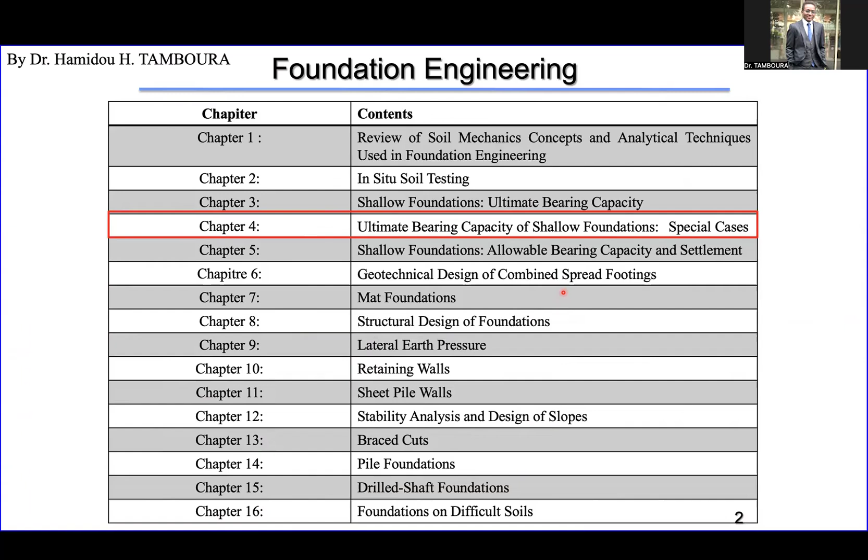We are on chapter number 4, special cases of ultimate bearing capacity of shallow foundation. And today we will talk about point number 7 of this chapter. It is about closely spaced foundation. So the effect on ultimate bearing capacity: if you bring two footings very close, what will be the effect on the bearing capacity?

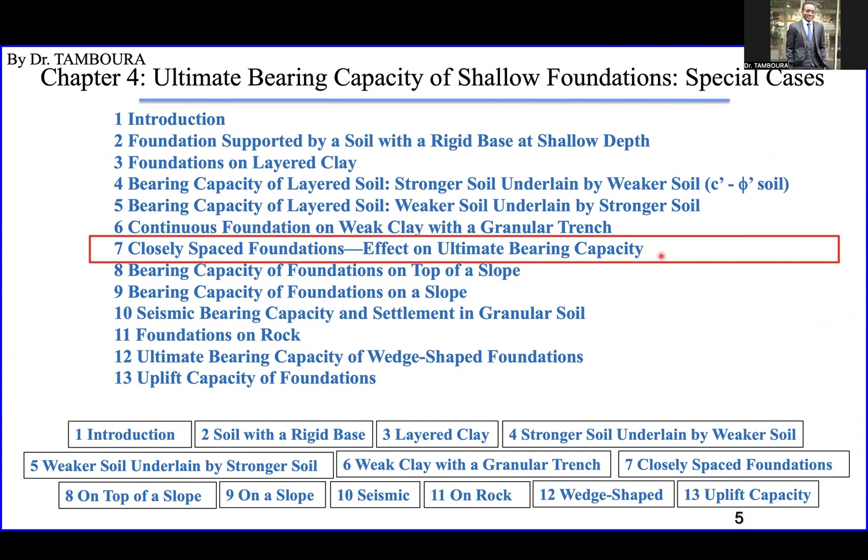So each footing will affect the other one. How can we estimate the bearing capacity of each of them? That obviously will depend on the space between the two footings. Okay, so let's go then. Closely spaced foundation, effect on ultimate bearing capacity.

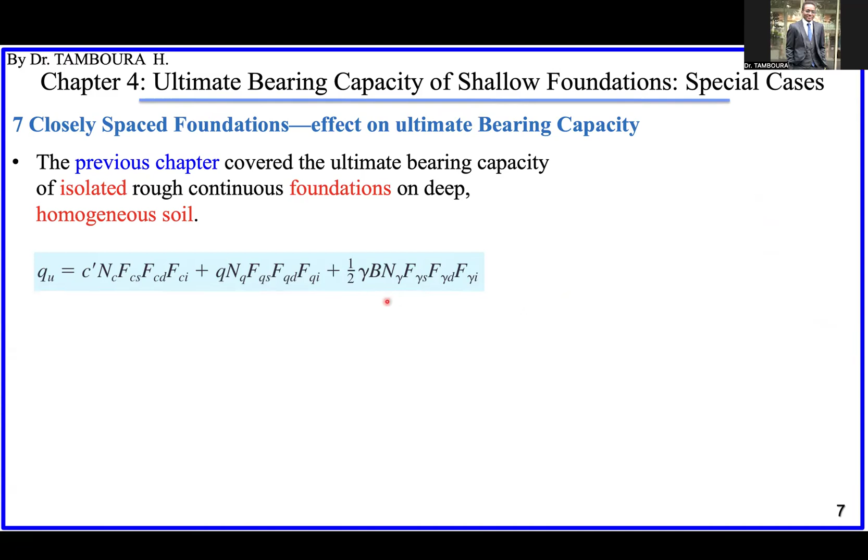As you know, in the previous chapter, what we did was only for an isolated footing on uniform soil. And we showed that in that case, this formula is effective to estimate the ultimate bearing capacity. But when foundations are placed close together on similar soil, the bearing capacity can be affected by the interference between overlapping failure surfaces.

As you know by now, everything depends on the failure surface of the foundation. In case of two soil layers, when the failure surface crosses the border, there is an effect. When it doesn't cross, there is no influence. Similarly here, if you have two footings near each other and the slip failure surfaces meet somewhere, there will be influence.

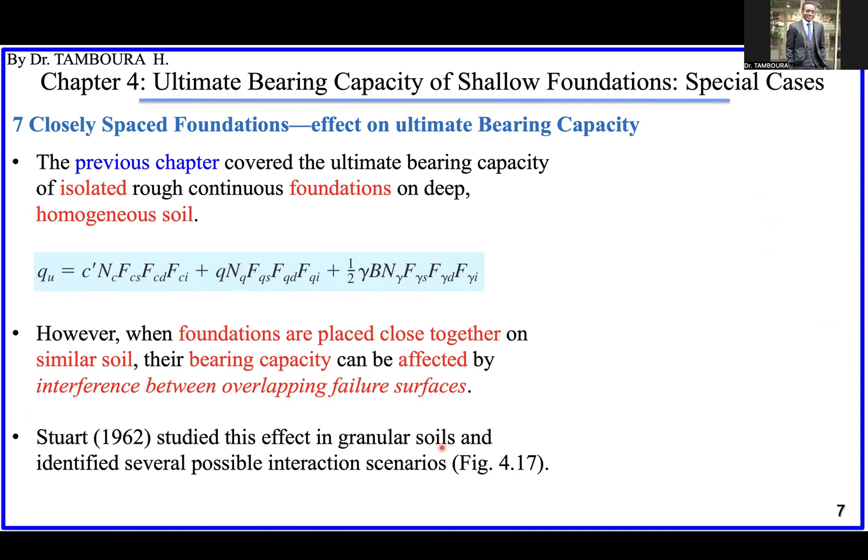Stuart (1962) studied this kind of situation on granular soil. Granular soil means there is no cohesion, like sand or gravel. And he identified some possible interaction scenarios, illustrated here. We have 4 possible cases, and step by step we are going to see how to estimate the ultimate bearing capacity in each case.

As you can see here, these failure surfaces are almost independent. There is no interference here. But here the interference is there, so obviously these footings will affect each other. And here is another situation; it's very close, almost touching.

Today we are going to see in each of these cases how the ultimate bearing capacity can be obtained. But remember, this is only for granular soil, and these are similar footings: B here and B here, same size. In case of cohesive soil, you can take it as a research topic and investigate what will happen.

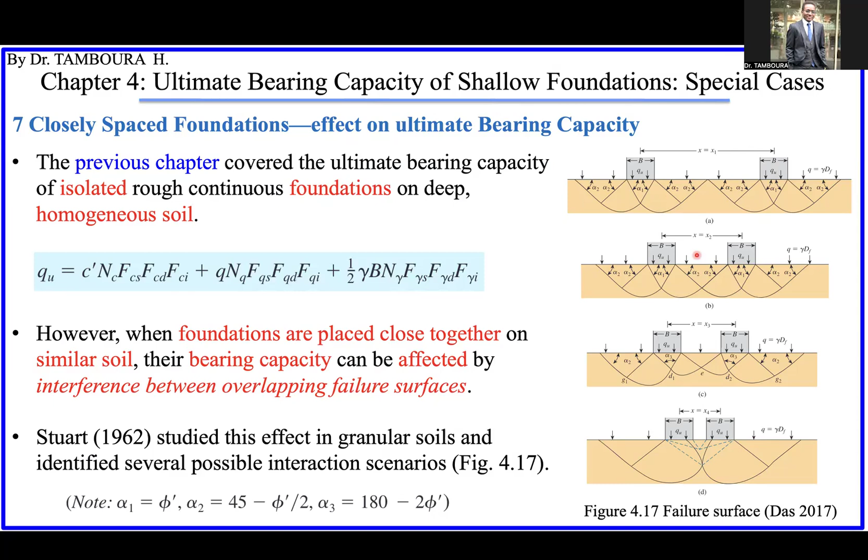All right. The angles: alpha 1 here and here is equal to phi prime, the friction angle of the soil. Alpha 2 is equal to 45 minus half of phi prime, similar to the Terzaghi theory. Alpha 3, found here for example, is equal to 180 minus twice phi prime. If you didn't understand this, it will not be a problem; you will still be able to estimate the ultimate bearing capacity.

Let's start with case number 1. Center to center spacing is very important: the spacing is not between the borders of the footings, it is from center to center. Case 1 is when the center to center spacing is larger than x1, which corresponds to the limit where the failure surfaces are almost touching. If the spacing is equal to or higher than this, the rupture surfaces are not overlapping.

Then the ultimate bearing capacity of each continuous foundation is given by the Terzaghi equation, only for granular soil here, the same general equation from chapter 3. This is the capacity for each footing. Nq and N gamma are Terzaghi bearing capacity factors. Remember, this is for strip footing; for square, circular or rectangular foundations, add the shape factors.

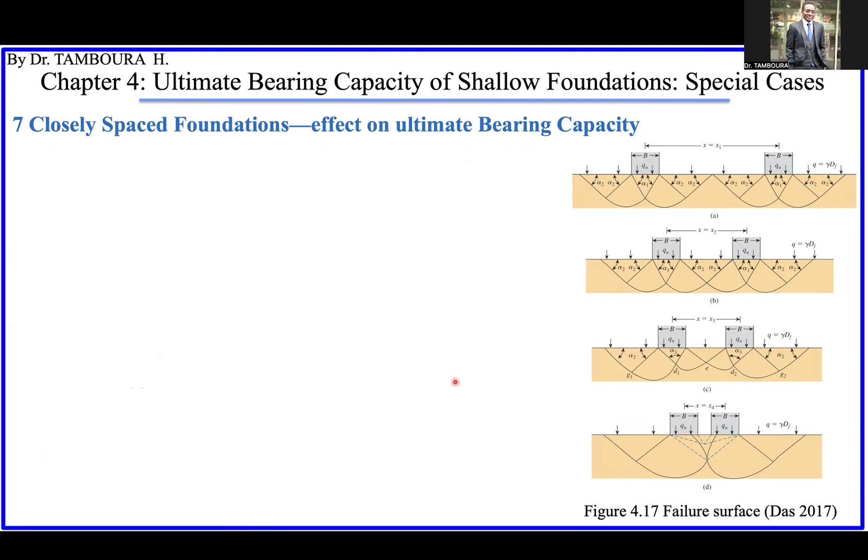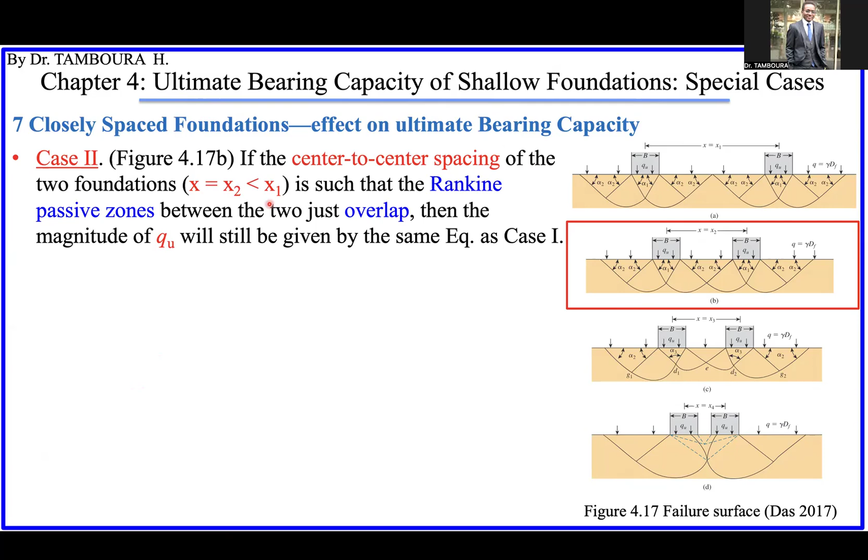Next, case number 2. You can see now that there is interference; the two failure surfaces are overlapping, but how much? The center to center spacing of the two foundations satisfies this condition: X2 less than X1.